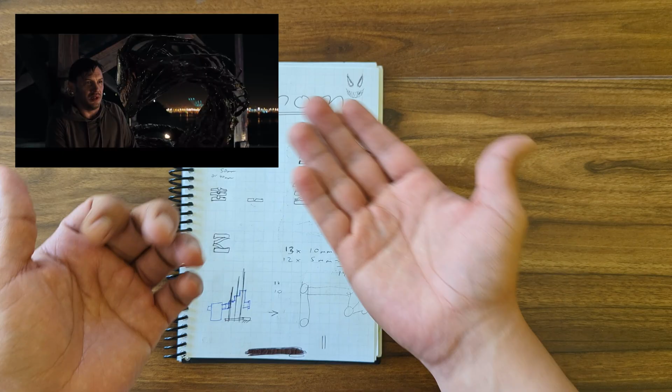We have 3 goals here. First, the tentacle by itself. By that I mean the structure and how we can make it move. Second one, the aesthetics. We're aiming for functionality here, but we still kinda want to make it close to the original one. And third, make it wearable, put this on top of a shirt.

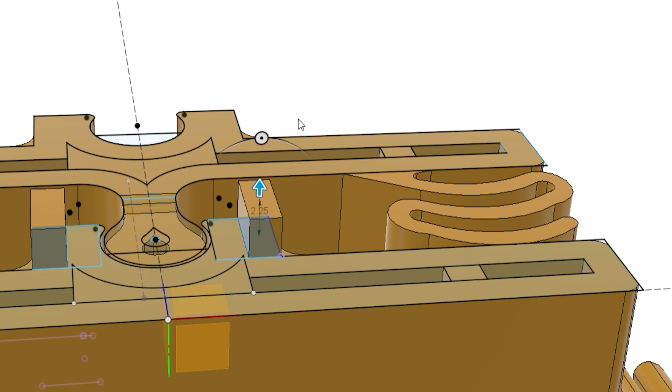Okay, let's start with the structure. First, we need a natural movement for the filaments, nothing like this. There are many examples of octopus-like tentacles, so let's start with those. Just finished this prototype for the structure of the filaments. You can see on the sides I made some kind of plastic springs. Now I added strings on the side so I can bend this structure by pulling them.

It is somewhat hard, but not that much. Maybe if I make the side springs a little bit thinner, then I could. I believe I'm doing this more complex than it should be, but it's a start. This option could have other uses, but in the meantime let's try another one.

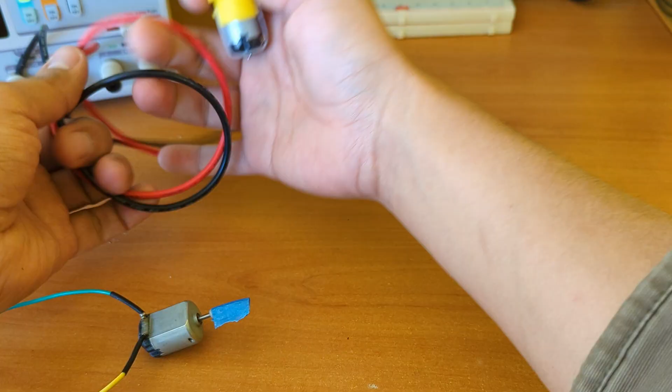For this one, I will use a gear motor. The difference compared to a normal motor, which is this one, is that this spins really fast. However, it doesn't have much torque, so I can stop it. I can stop it really easily, right? So in order to turn speed to torque, a series of gears are used, and therefore we have a gear motor. This is the same, I just added cables, because usually they come without them.

This one is a lot slower, it doesn't spin nearly as fast as the normal one. However, this is a lot harder to stop. And since what we need here is not speed, but strength, it is perfect. And we don't need Arduinos for this one, so even better.

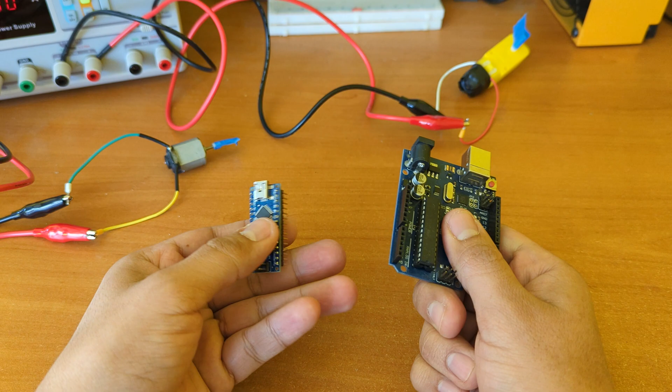This version is a lot more fun, and in theory, more stable. 3 axes will be moved by the motor and give a smooth motion. First test. Okay, second test with less voltage. Look at this. Very nice. Time to improve the design to something more slim. So much better. And we save a lot of space.

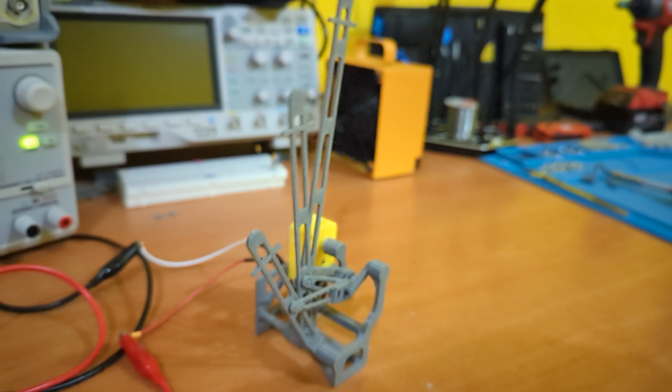Now that this is working, I can add rings that will be the skeleton of the filaments. Okay, now that we have this, I can tell the rings from the bottom and the middle cannot surround the axis from the upper ring. We could only have half of the circle, but that is just not enough.

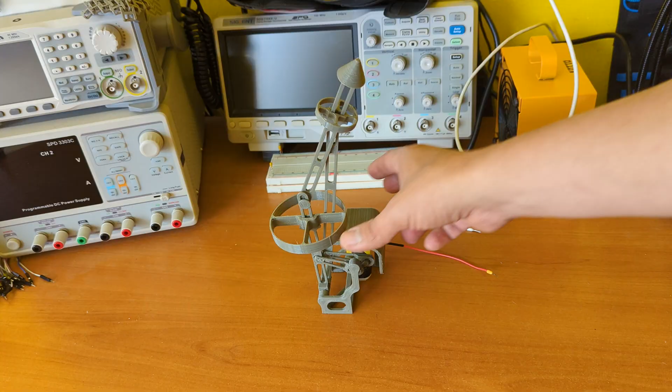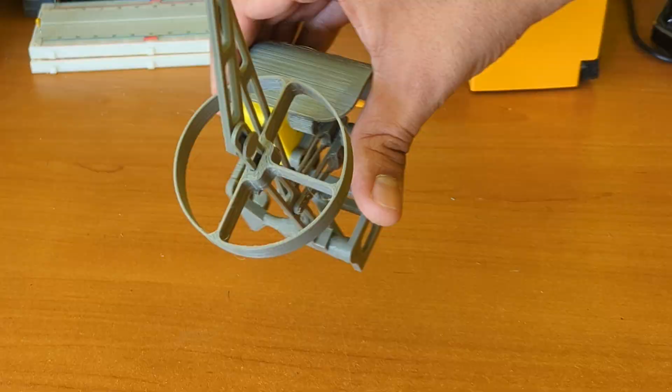Alright, third and final iteration. You can see there's one less axis, there's only 2, before there were 3, and this bottom ring completely surrounds the upper axis. And besides, with this connection, we have an even better movement. The top side moves with a different inclination than the bottom one, which gives us a more natural motion.

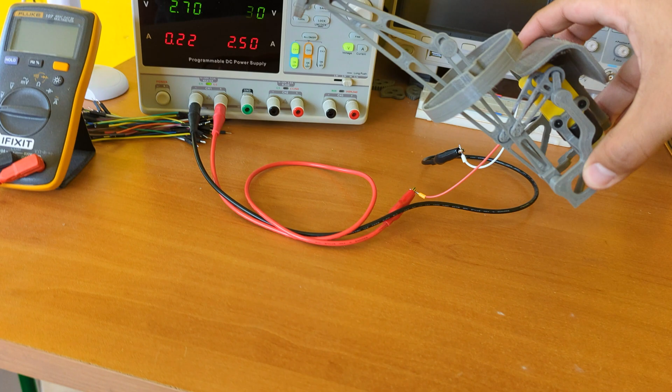And I made the design so it can work sideways or upside down. Nice, right? This circuit I made is not only for controlling motors. I added an extra feature, which I will show you guys later.

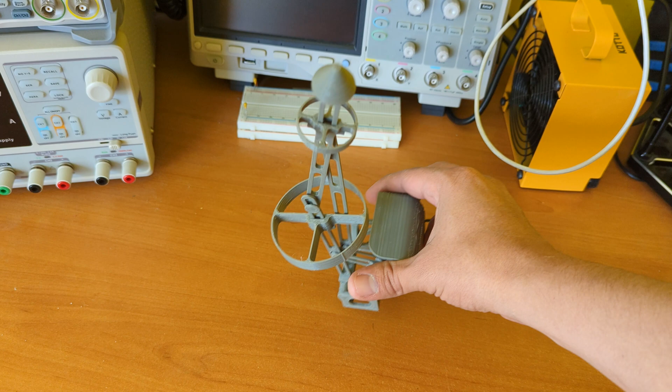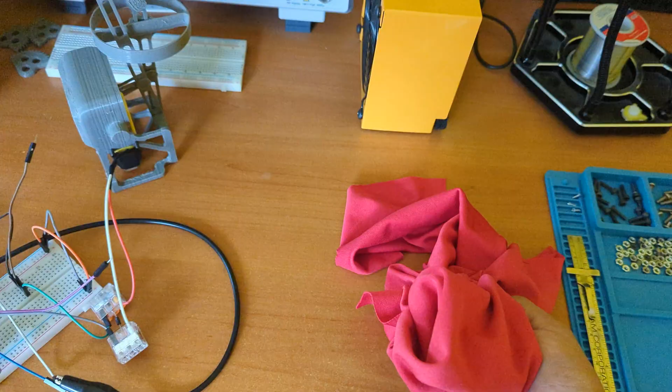Next, this 3D printed chainmail. There are a lot of different designs, so I just printed this one. It does slip very easily, which is what I'm looking for, but it takes some time to print, and to think that it will have to cover everything makes me believe there are better ways to do this.

Third option. What is it? Well, that's a garbage bag. Only the best tech on this channel. I want to try this because it is already black, so no paint is required, is very non-expensive and really easy to find.

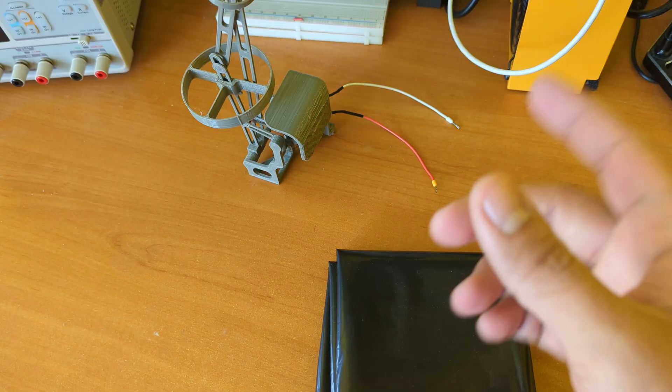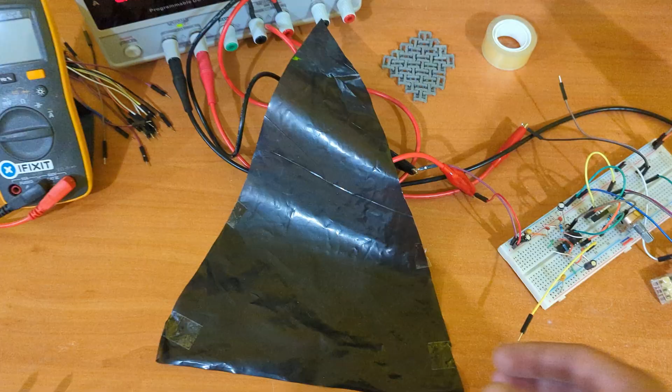Ready? Okay, great. I made a couple of triangles of different sizes to try and check if the movement is not affected. I also attached this cover in 2 points with tape, just to simulate it is already attached on the inside. Okay, looks good and works just the way we need it. That option it is. Now that I know they work, we can move on and assemble the rest.

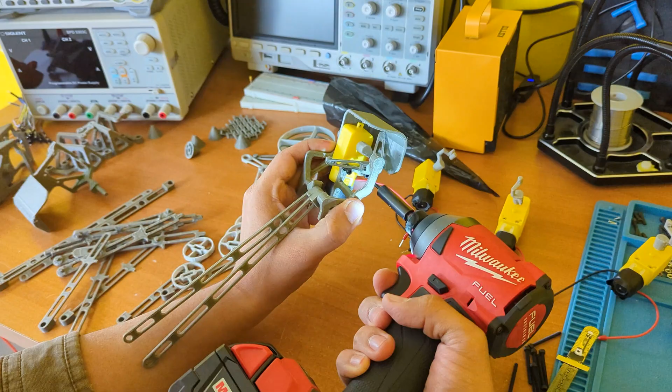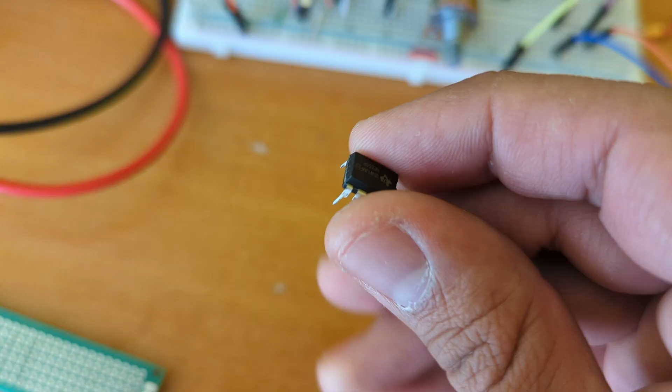By the way, about the extra feature I talked about earlier. Remember the electronics from before? I will make them smaller in one of these perfboards, but the working principle is simple. See these two black squares? They are clocks, and are called like that because they output a square signal every given time period. In this case, the first one sends a pulse, and the second one takes that pulse and modifies it to whatever we want. And we will control that second output with this dial.

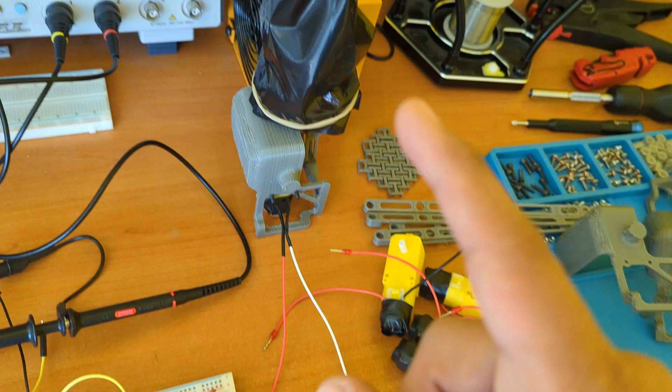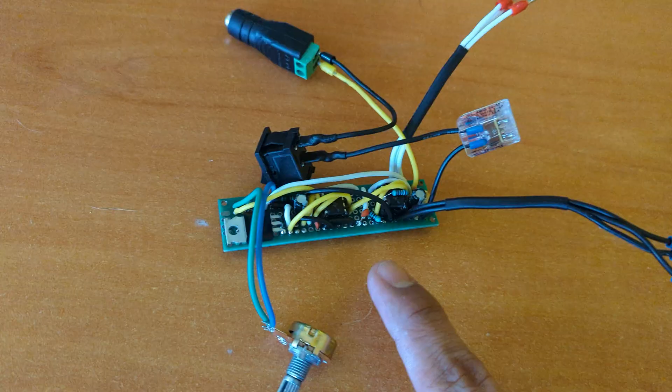The output goes into this thing called a MOSFET. Think of it like a door. What is behind the door is the voltage that goes to Venom. The longer the signal from the second clock is up, the wider the door opens, and therefore the faster Venom moves, and vice versa. All of that is to say that this will control the speed of Venom. The last part of the electronics is to make a case for this.

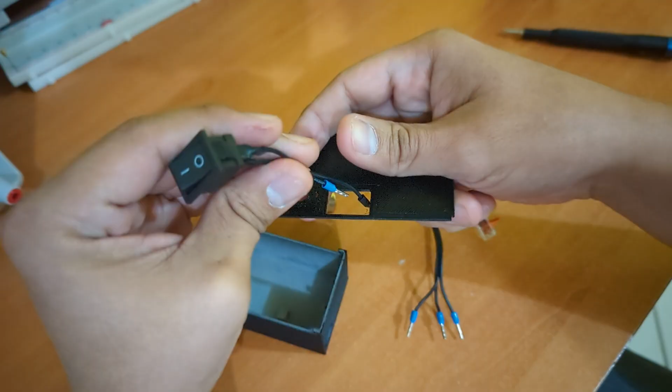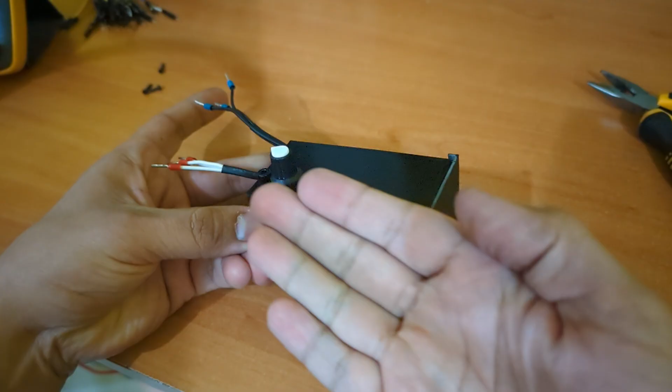Also, I added this thing in the back so I can put it in my pocket. Wait, it's bubbles.

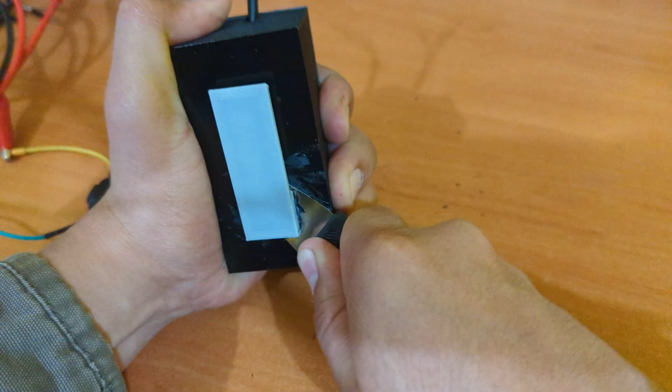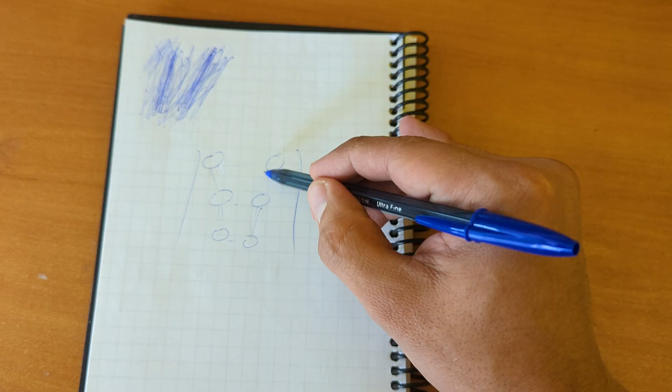Finally, we need to figure out how I'm going to wear all of this. So, this is my back, right? And let's say these are the places where the filaments are going to be in, with different spacing between each one. I will need a frame that looks kind of like this, and I will attach Venom to these places. And for that, I will use this sheet of aluminum. Finally, I have a use for you. I hope this is enough for all of this.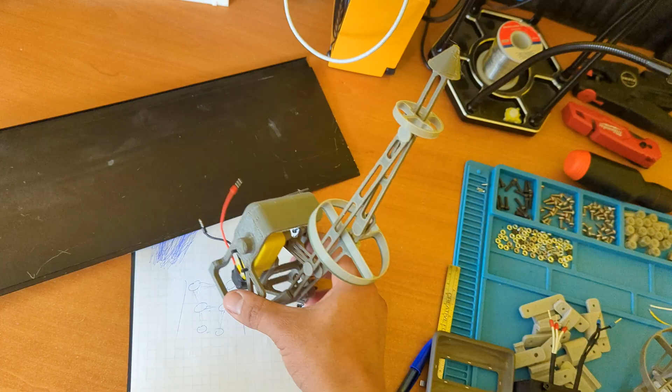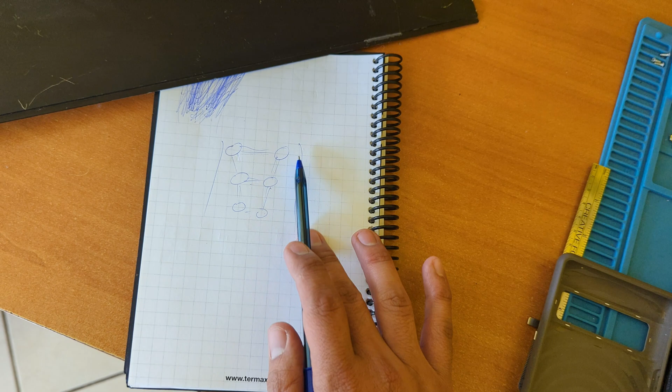Maybe when I put this on the frame, I can add some kind of angle so they look a little bit more natural, instead of all of them in the same way. And to attach all of this to me, we can solve that later. And because I realized I was going to attach these things to some kind of frame, I already 3D printed these things, which are going to be these two sides.

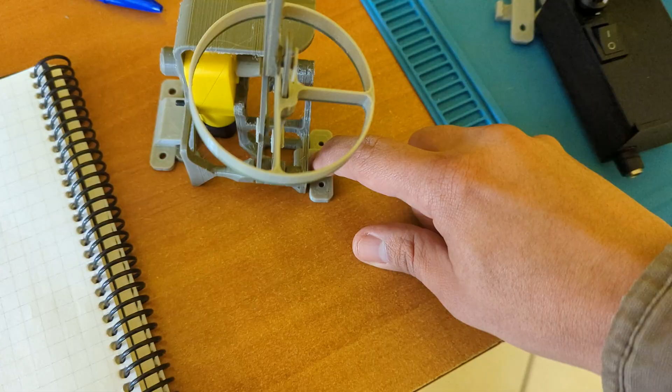Also, they look like little elephants. So cute. Sorry.

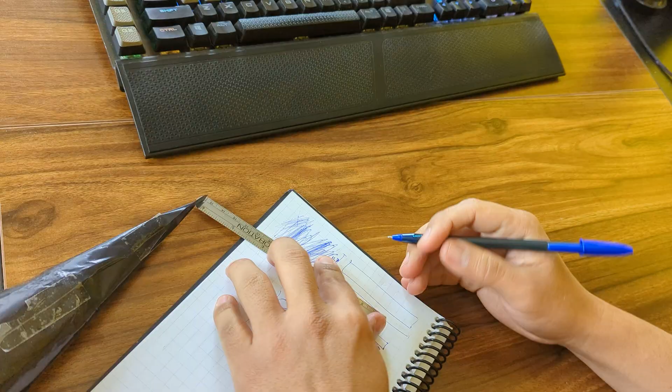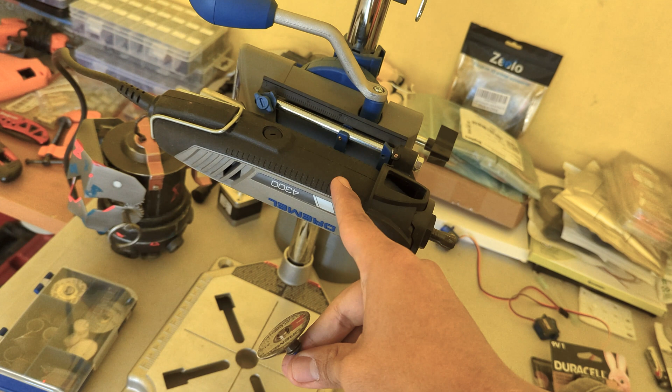We're going to make the most out of this small aluminum sheet, and we're going to have these 4 beams. This one, and 2 in order to attach them together. And all of this is going to be with the Dremel and of course the metal tool.

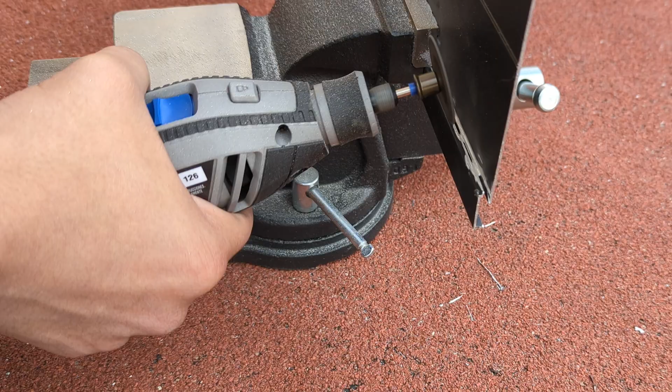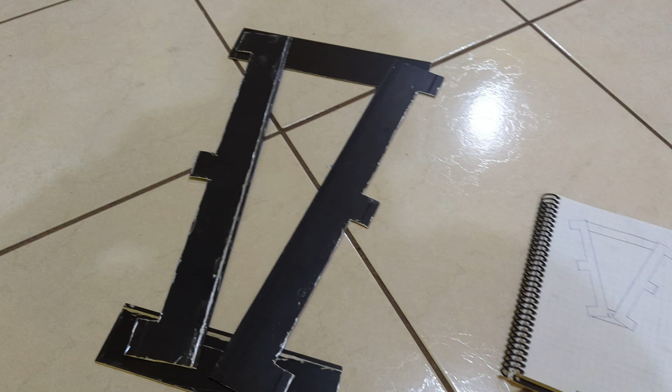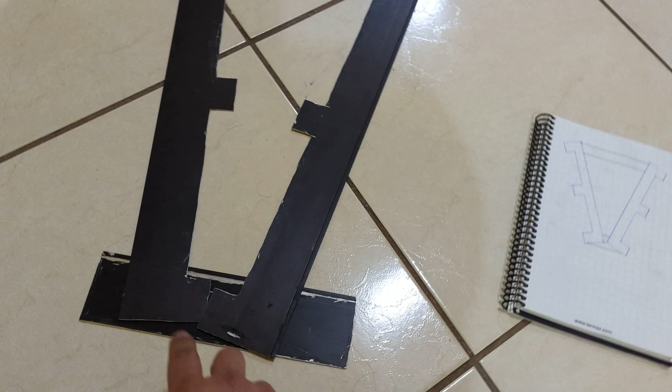So the frame is ready. However, I think it's better if I turn these guys around. And that should be it. I'm just going to drill a couple of holes so we can attach the little elephant things to all of these 6 places. And we'll see how that turns out.

Okay, all the holes are ready. You can see I drill these sidebars to the horizontal ones so it can give it a little bit more of a structure. And we are ready to put all of those in here. Just need to tap them with some screws.

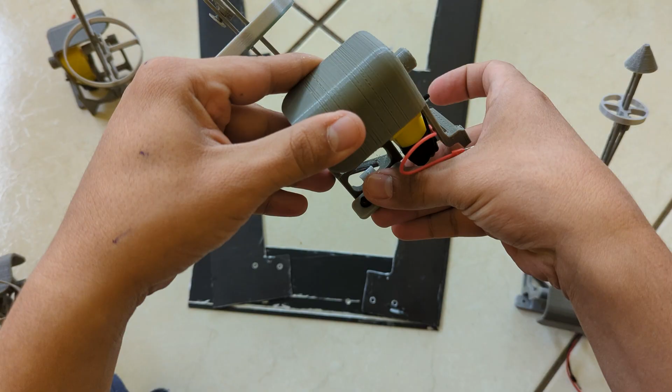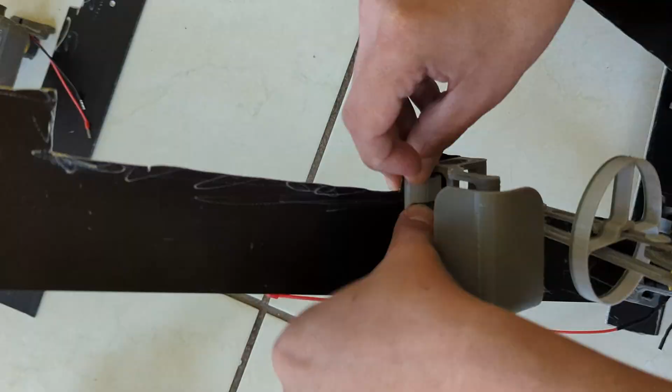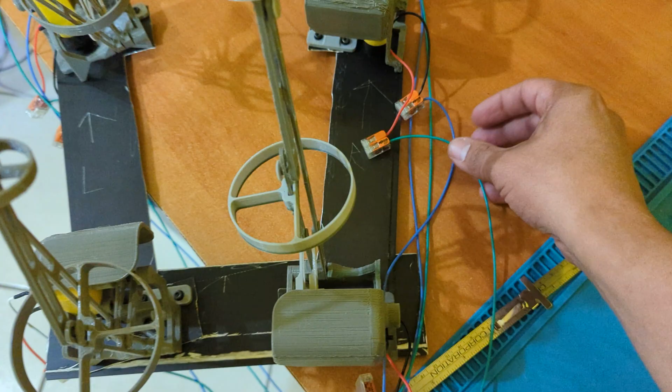I just finished connecting everything. I didn't realize there was going to be so many cables. And also, I believe I'm going to attach this with some hot glue and do a little bit of cable management, because of course I don't want this nightmare to just be hanging around. And it doesn't matter if this is not black, the cables are just fine because everything is going to be covered up. So yeah, we're on the right track.

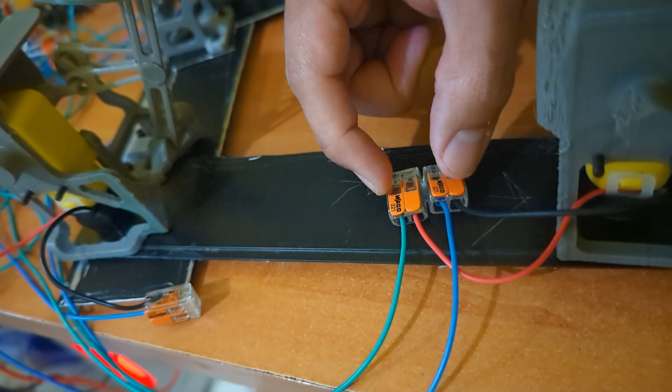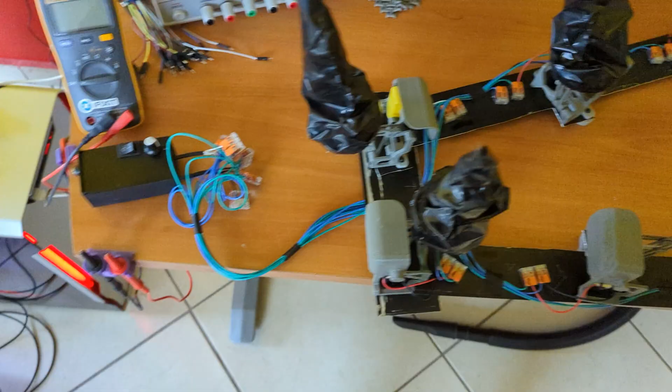Cable management is ready for both sides, except this. That's okay. We can forgive that, right? I also placed this cover for the filaments, and I placed these guys so the screws that are going through the metal don't really poke a hole in my shirt. That is also going to help to make this a little bit more comfortable than just having a sheet of metal on my back. Now I'm going to place a bag here on top of everything. Only these guys will poke out.

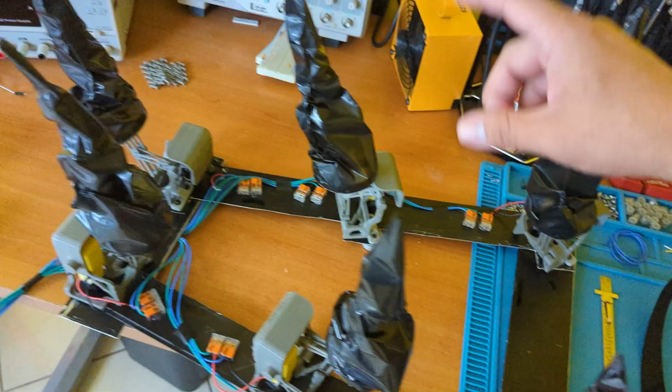Also, I figure I can just add Velcro on these two upper areas and also in the middle, so it can hold on to my waist and to my shoulders, and I can put everything like a backpack, so it will be really easy to put on and take off.

Alright, so this is the last test before I put on the bag I just got. You can see the 6 holes are for the 6 filaments. It's going to cover all the structure and also all the cables. So how this is going to work is I have 2 straps in here. This is all Velcro, you can see. 2 straps for the shoulders and 1 for the waist.

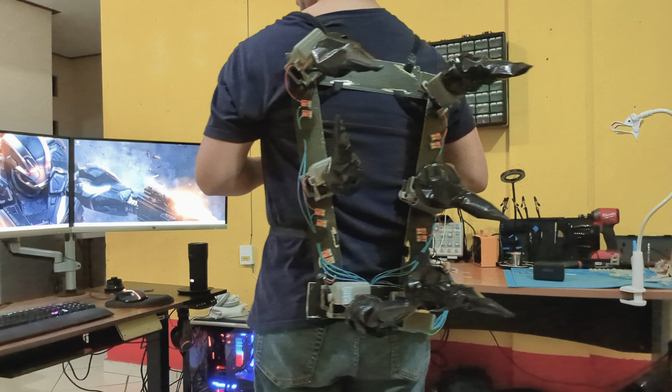So this will, actually I can make this a little bit tighter, so it makes sure nothing moves. It's looking pretty good, but it looks even better with that thing on. Okay, so let's just put the bag and finish this project to see how it looks.

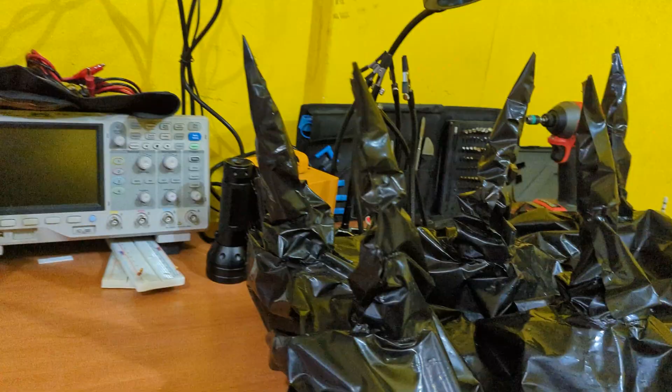I made everything modular in case I want to disassemble it and use, for example, the filaments for, I don't know, Halloween decorations. And also I can put it back again in case I want to wear it for a Halloween costume or parties and stuff.